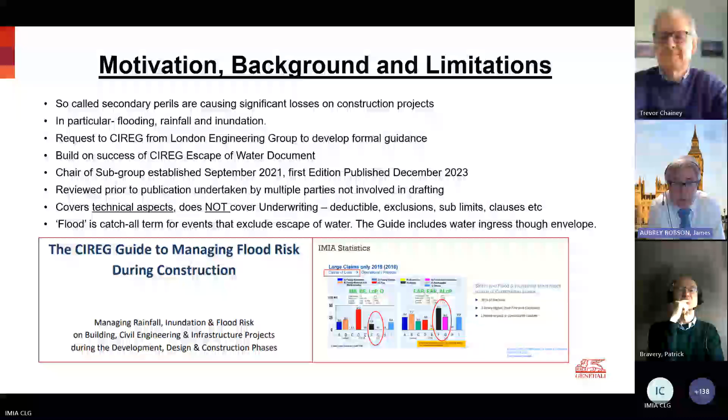Just to give a bit of background, I'm not going to read through these elements of the slides, we're just going to try and discuss them as they go through, but there are some elements in there. CIREG were approached by LEG and others to formally put a guide together, and it took a couple of years to write. It does cover technical aspects. It doesn't cover underwriting, deductibles, exclusions, sublimits, clauses. We've anonymized it as much as possible, and the word flood is a catch-all term, and we try to go through those elements as best we can.

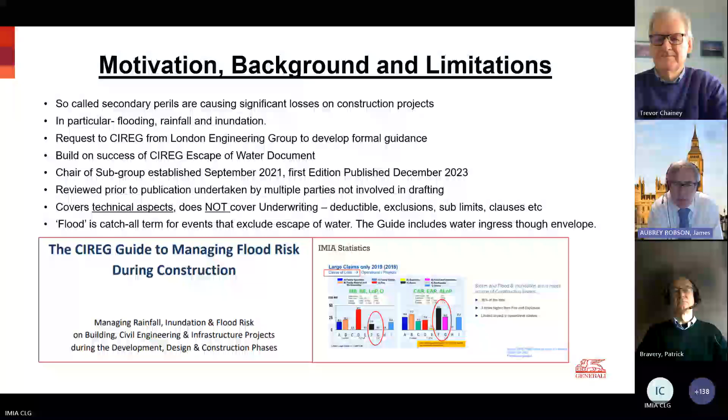We would strongly request that you review the document and send it out. It's no good being left on a shelf. It needs to go through the clients and through the brokers and through underwriters to get it widely used, because what we're looking to do is get a broad approach. The more people that use the guide, the more consistency we can get.

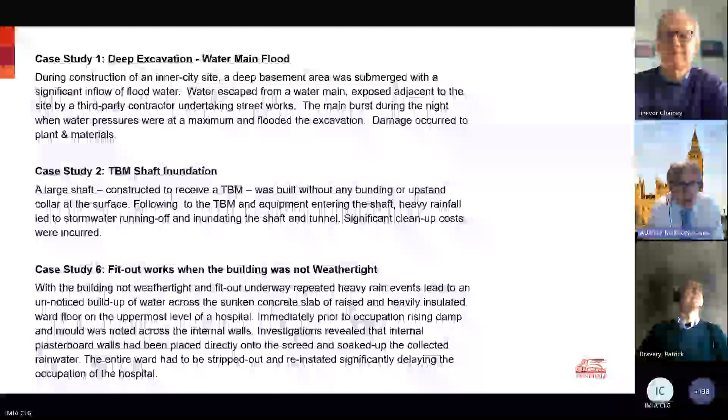Within the guide, we highlight a number of case studies - I think there's 23 or 24 in total - which just give a bit of an overview. So we'd be going through deep excavation, water main flood risks, various elements where we've identified or seen losses in the past. What we're trying to do is create a context for the document.

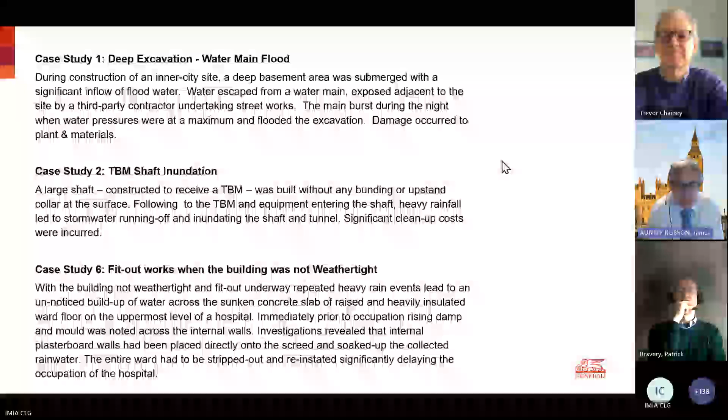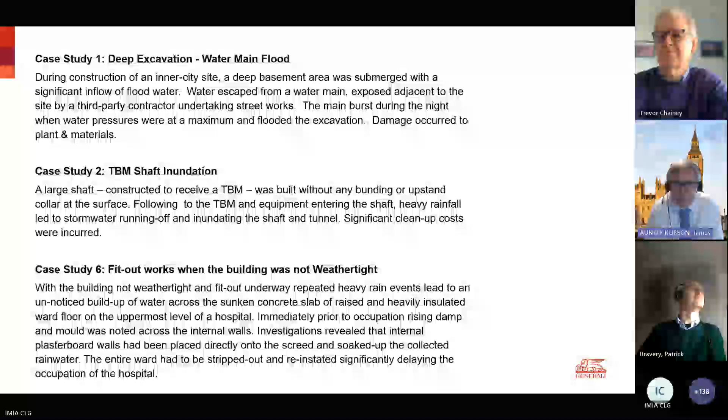I'll give you a moment to read that page. We're also trying to pick up the impact of such events, not just the physical side, but the time impact that relates to any reinstatement works. If we could move on again to the next page.

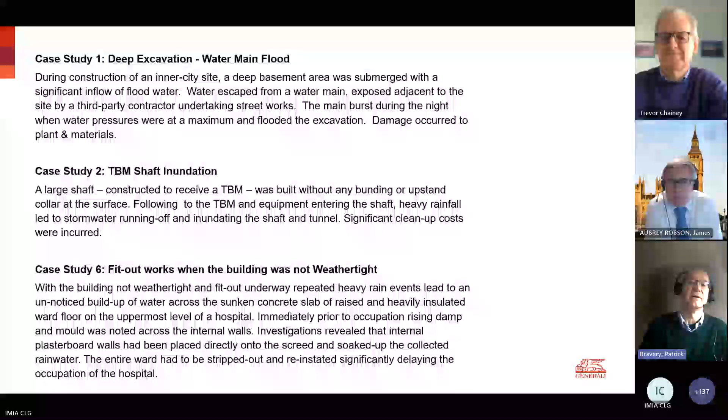James, if you don't mind, just step in there and clarify the scope of the document. Because you say not including escape of water - that's covered elsewhere in another CIREG document. But that first example there, water escaping from a water main, there's potential for confusion there that could be viewed as escape of water, but that's an external water main bursting and bringing water onto the site, and that is within your scope, right? Yes, we're looking at basically external sources of water that are going to penetrate a building envelope or affect a project.

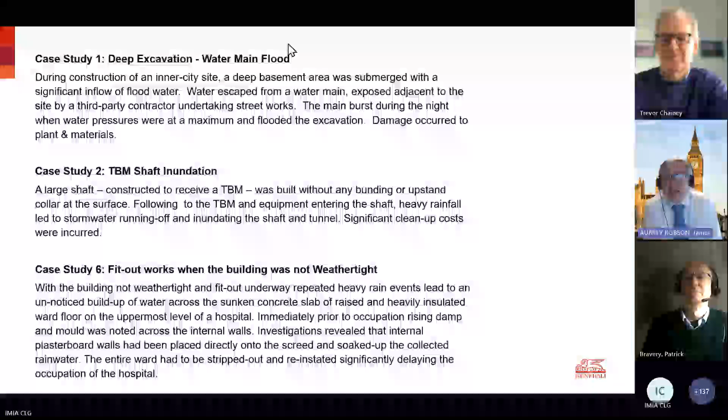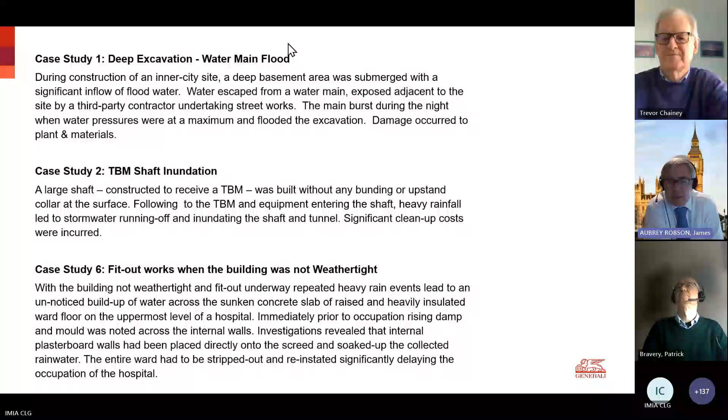Escape of water - there's recently been an FPA RISCAuthority update on the escape of water joint code of practice, which we, as CIREG, were part of the drafting of, and we would strongly recommend that people look at that as the next step forward in escape of water management on projects, i.e. damage within buildings caused by that. We are looking at external forces, as we said originally - rainfall, inundation, and external flood risk. Yeah, so that's a good clarification, I appreciate that.

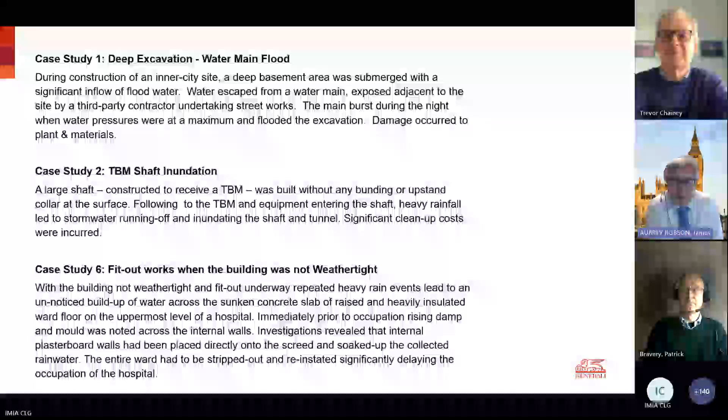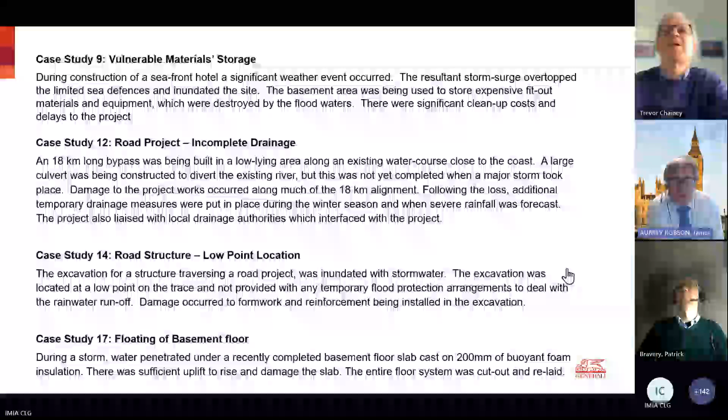The next one, please. Just pop onto the next screen. We do obviously highlight examples of damage within buildings - that's section 5. Again, these are just samples, examples of different sorts of water-related damage, which are extensive. Again, we will point you back to the guide for these ones, but we just wanted to show what's within the guide driving our consideration.

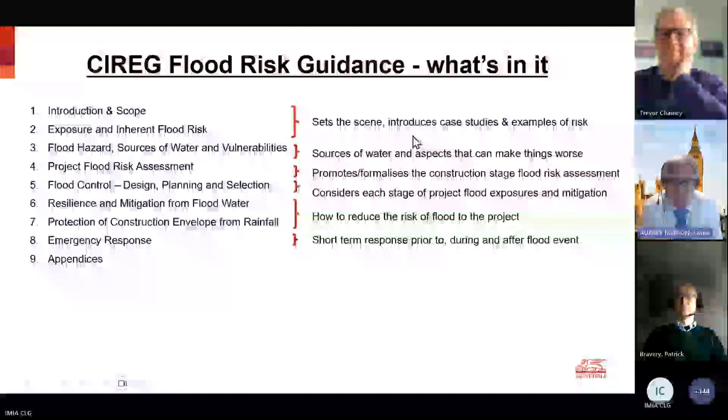Move on to section 2, please. Next slide.

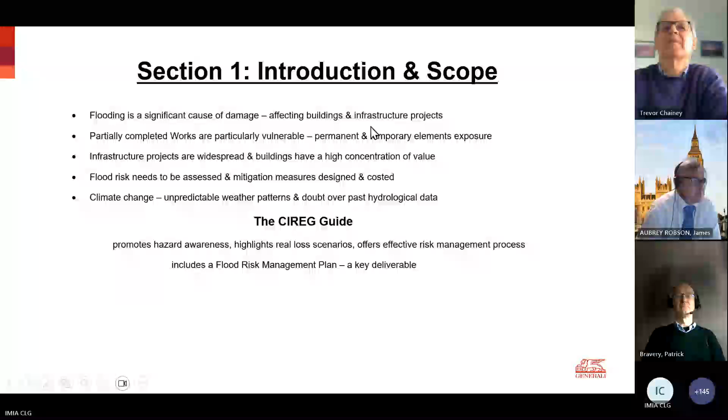Again, we're trying now to drill down into those areas where there is exposure to the project, which are going to require consideration. And again, these are areas that we've found in the past that create the vulnerabilities.

I'll give you a moment just to read through that. We're trying to keep the slides short, so to get you to look at the document itself. We've discussed these areas in detail to come up with a document that's going to work. Moving on, please.

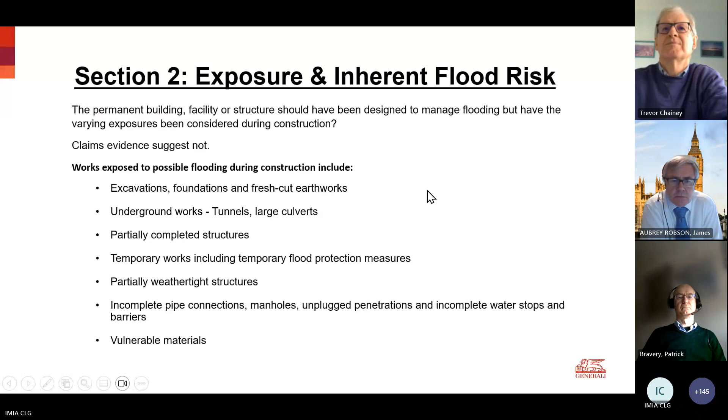Again, what we're just trying to do in this is identify some points to be considered within the project itself - things that maybe don't immediately come to mind, as well as the inherent risks, and the indirect consequences of flooding.

And I think we're seeing more impacts of the indirect consequences, especially on business disruption elements. So we are trying to pick up those elements again, just to be considered.

We'll flip through because I think there's more meatier sections throughout the document.

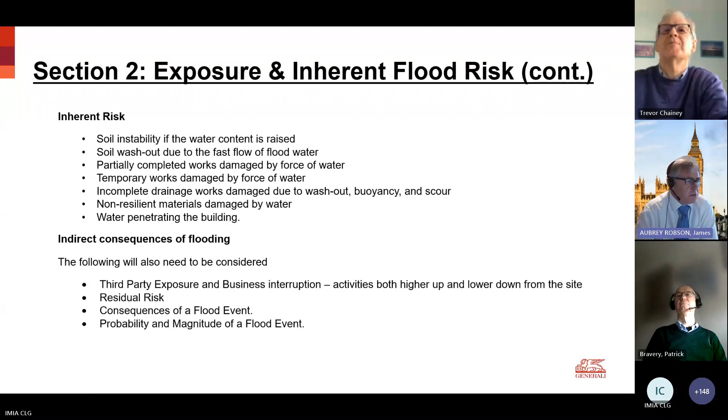And then on section 3 we come to the common causes and sources of water and their impacts. What we're trying to do is explain, focusing on those external sources that can cause issues, and just highlight those sources - and the next page covers vulnerabilities.

So if we move on - I'm speeding through these elements because the meat of the document is later on.

Again, looking at the locations and topography of the site and the topographic changes of the site. Obviously, as we are infrastructure projects, large developments do cause changes to both the topographic changes and the runoff and other catchment issues with water.

As we said, changes of use, the impact of agricultural areas, the sediment and blocking of culverts and drainage systems - that can block pipelines and things like that.

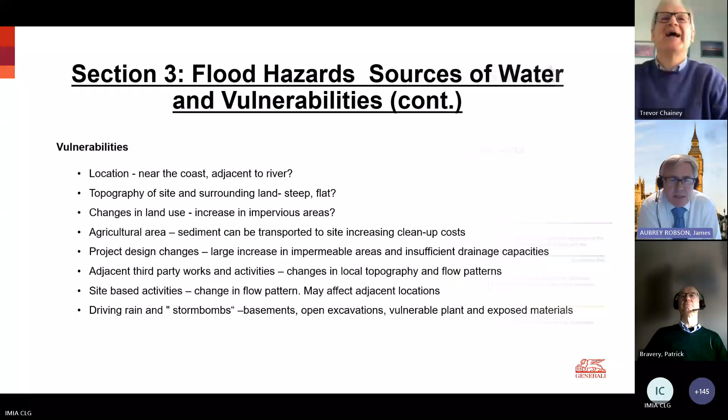Want me to take over now then, James? Yeah, if you can, thanks Trevor. So section 4 is about project flood risk assessment.

The usual procedure at planning stage is that the project sponsor will have a flood risk assessment done purely for the completed project, but we very rarely see construction phase risk assessments for flooding. This is where it's very important that the project flood risk assessment process should typically include, as a minimum, all permanent and temporary works, because that's where things are vulnerable, especially with diversion of large pipe works, culverts, channels, etc., where there can be considerable damage if temporary works aren't designed properly, along with elevation or protection of sensitive equipment.

A bit further on in the document we talk about the storage of materials - there's quite a meaty section on that. Elevation and protection of sensitive equipment when it's being stored, appropriate sequencing of the permanent works during the construction phase, and provision of storage for construction materials and equipment.

This is something we've seen on some projects in Wales. When I was a young site engineer, we always used to put a berm at the top of excavations and a channel to take water away. This wasn't done on one project, and unfortunately all the water ran down and all the slopes collapsed. The remedial action was to put a berm at the top with a channel taking the water away. Often that's included in the permanent works, but sometimes during construction it's done out of sequence. So it's things like that you really have to be careful of, because a little bit of water can cause an awful lot of damage.

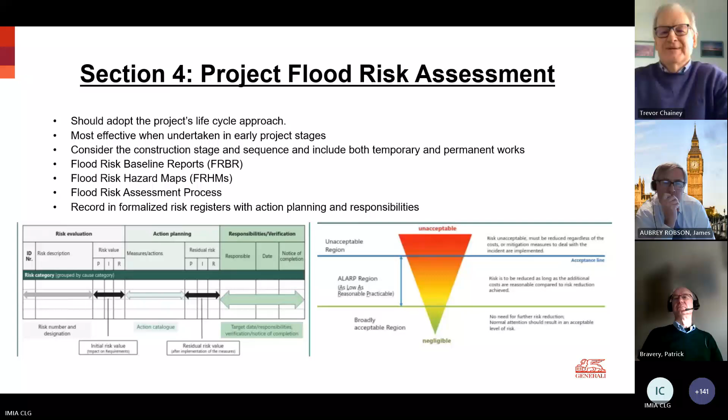Again, there's just some more notes about the procedure.

Thankfully, in the UK, and I believe mainly in Europe as well, the process is project sponsor, planning, etc. Some of the information I've seen from Africa, for instance, it's fine if it's a European contractor involved, but if it's a local contractor, you just don't seem to get this information, and you have to ask for it all the time.

All right, next slide, please.

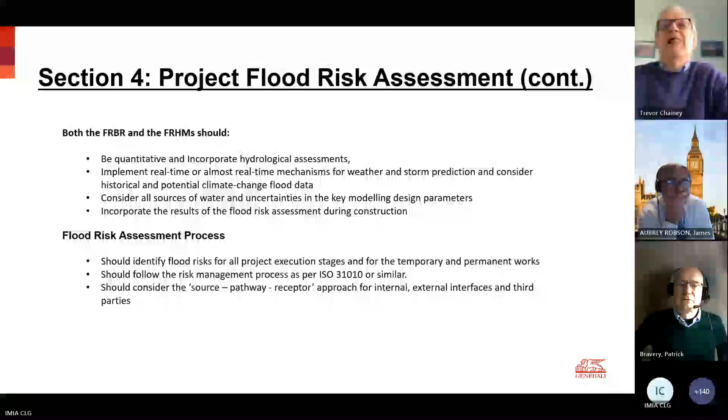Trevor, there's been a question come in which is probably relevant to take at this stage, and it chimes with something I've been thinking about as well, so I'll read out the question and maybe follow up after that. The question is: would you see early contractor involvement as a tool to improve flood safety in regards of construction risk, and maybe broaden that out to the extent to which the form of contract has an influence on the ability to tackle these sorts of issues during the construction process?

Well, yes, I would see that to be very important, especially if there's got to be a lot of redirection of rivers. I've only ever been involved with one early contractor involvement project, and that was for a bridge over a very busy motorway. The amount of water diversion wasn't actually important there, but obviously keeping excavations free from water, so there wasn't any damage caused to the existing road. So on that one, yes, there was the NEC early contractor involvement. Contract let, the contractor got it, and then they began doing the design work or the construction program with the original designers.

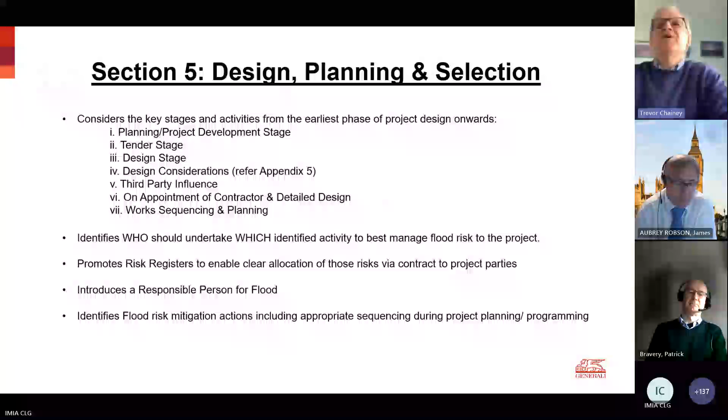Section 5 - consideration must be taken for all of those items listed well before work is started on site. This section determines key stages and associated activities related to each stage of a typical project, including the use of risk registers, introduced to enable clear communication of identified risks to the supply chain and clear allocation of those risks by contract to parties within the project. We introduce the concept to ensure a responsible person for flood is in place, with a clear line of accountability in respect of flood.

I've been to sites where you point out those items and they say, oh, the site manager deals with that. And you think, well, he's probably got far too much work on his hands. This needs to be someone else out there making sure the pumps are working, the temporary works are in place, and it's going in accordance with the risk registers. Because if you're doing an over-pumping scheme, the pumps only need to run out of fuel and that's it - you can have a very large claim for what would have cost very little to keep going.

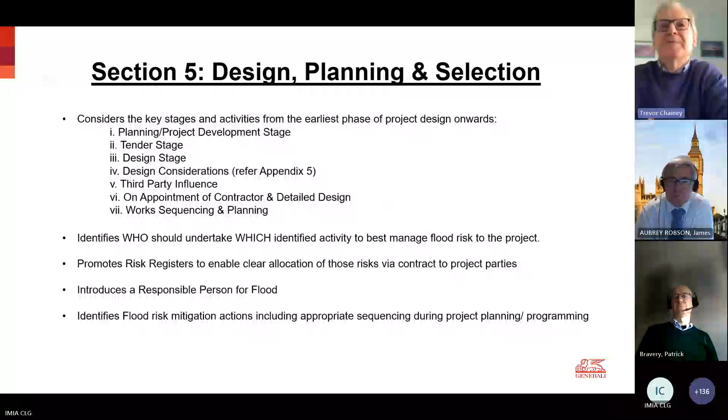Next slide please. Trevor, if you don't mind me jumping in - going back to the point I made in the introduction, as much loss activity comes from weather and water as fire and explosion. We'd expect there to be some sort of fire marshal or fire warden, some dedicated fire protection resource, but we never expect that for water. Perhaps there ought to be one - perhaps there ought to be a water marshal or a water warden.

Yeah, absolutely. Talking about that, we introduced the responsible person - that came from the CIRIA document. It's trying to create lines of responsibility with an overview. They don't have to be the project manager, just somebody with the skills and knowledge to ensure the work is overseen in the way it should be done. I think it's starting to pay dividends in the escape of water field, because there's named people in place.

On resilience and mitigation - I was at a project the other day with multiple temporary pumps and generators, unfortunately all very close to each other. There's a potential for these things to catch fire, and if you lose one pump you're going to lose all of them. So you have to consider the impact of losing the entire pumping scheme if you've got insufficient separation between the elements - it's like looking back to the property world to see what you need to manage these systems in a reasonable way.

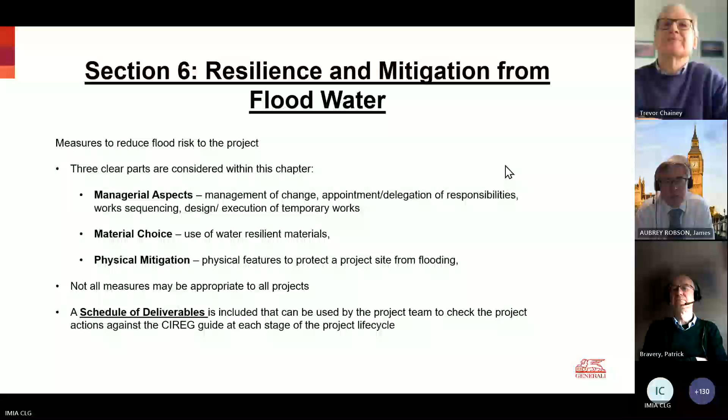Please, Trevor, we've interrupted you long enough. No, it's all right, I think, yep. Well, if we move on to the next slide then, which is section 7, which is one that James was far more involved in than I am. But basically...

It's what it says on there - we've seen a lot of the high rise in London have quite substantial damage purely from rainstorms getting through the elevation, because usually, if it's a project where they're using a lot of pods, such as student accommodation or hotels, and the pods are being made off site and brought in, it's in those temporary sort of doors that they've left in the external elevation.

So it's a matter of making sure there's a proper plan of how it's going to be worked, how the building can be made perhaps temporary waterproof during periods when there's going to be high weather or larger vulnerabilities from the weather. Whereas, certainly on all the ones I've seen, it's always one of these plastic doors that's been put up, like a warehouse door that's on temporary there, and they're just not adequately closed up during the weekends. Rain comes and no one's there on site to deal with anything, so it can cause a very large amount of damage and drop down the number of floors.

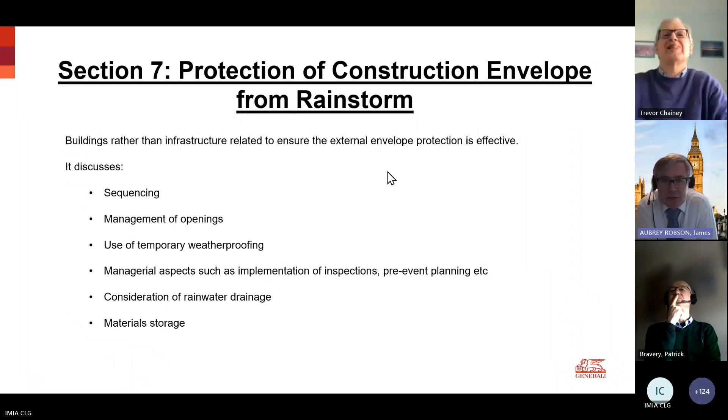Again, Section 8 is just trying to put in place appropriate procedures, using the responsible people to put flood warnings, getting the 72-hour or earlier flood warning plans pre-agreed and written, and being able to roll them out. There's some excellent hurricane management ones in the US that can be used, and other tropical cyclones out east.

It's just the appropriate responses, and it requires consideration and practice, understanding how they're going to protect the site and the people, having identified the vulnerabilities on the site. It's about understanding what's currently being built, what's vulnerable and what you need to do to mitigate against causing significant damage or needing restoration works, so you can get back on track as quickly as you can. There's some excellent information systems out there.

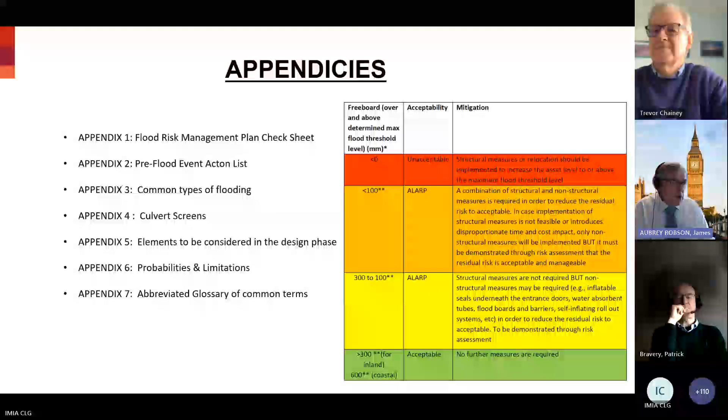Going through that element, there's a section on culvert screens, which are particularly vulnerable, and then we've got section 5, which again goes through the elements to be considered and goes into greater detail on the probability and return periods, giving examples of what those mean.

Oh sorry, so that's section 6. Please have a look through them because they'll give you greater insight. Flooding can be confusing with return periods, probability exceedance and reoccurrence intervals. It's about being able to understand different languages, because it can be quite confusing to understand exactly the exposure you have. What we try to do is simplify that, to create a small area where you can understand what your exposures are.

So that's the document itself, with a bit of appendices at the back. Coming to the end of the talk, and prior to finishing, I'd just like to send my thanks to the other co-authors of the report.

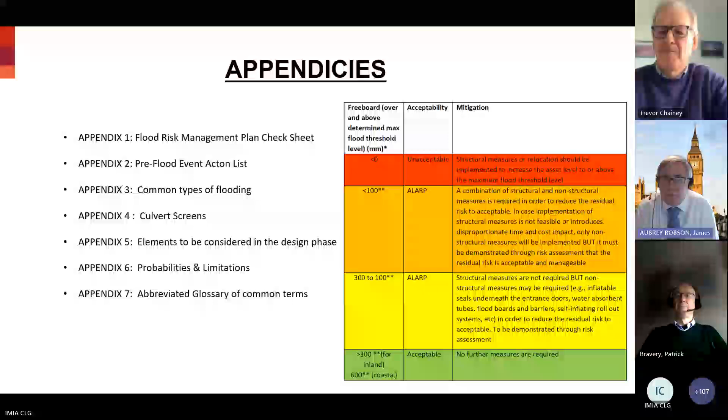Just one question, a little bit beyond the scope of the document, but it makes a very good point. It says flood is a high risk, but extreme temperatures and drought could also be a high risk. Your document is very specifically addressing flood, but I'm interested in your observations on that. I would make the point that this is exactly why we would look for a robust risk management framework within any project, because if you've got a decent framework for identifying and managing risk, then whatever risks get fed into that process can then be managed.

I wonder if you had any observations on the broader range of physical climate change risk. From the permanent works point of view, they should be looking at climate change, because in the flood risk assessment done for the permanent case, they will have included climate change over whatever the design life of the project is. So one would think that within this much shorter construction phase period, it would have all been accounted for from that point of view.